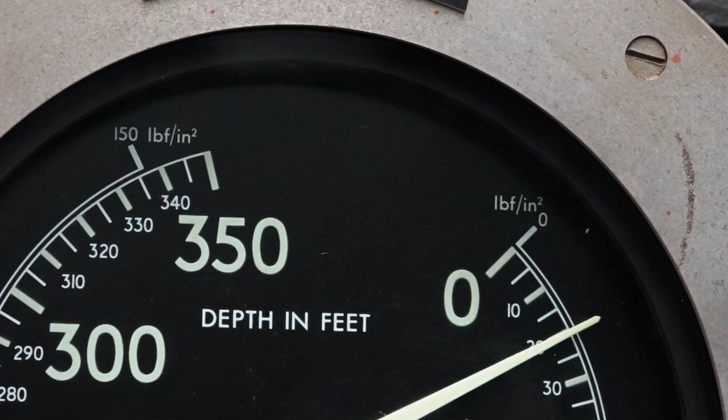April 10th, 1963. The most advanced submarine in human history dives off the coast of Cape Cod for a routine certification test. She never comes back up. More than 60 years later, the Navy will not tell you the full story of what killed her. Not really. No, it was not a Soviet torpedo. No, she did not dive past her crush depth. The USS Thresher died from 3 engineering decisions that were built into her on purpose.

129 men went down with her, 16 officers, 96 enlisted, and 17 civilian shipyard workers who came along to watch her pass her final test. Every American submarine that has ever sailed since exists in her shadow. Every welding standard, every inspection rule, every safety protocol in the fleet was written in her crew's blood.

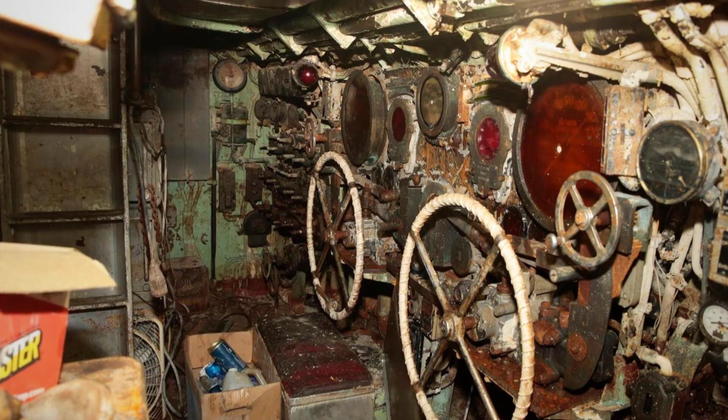And the worst part is not the flooding that started it. It is not the reactor shutdown that made it fatal. It is what happened to the one system that was supposed to save them. But first, you need to understand how she started dying.

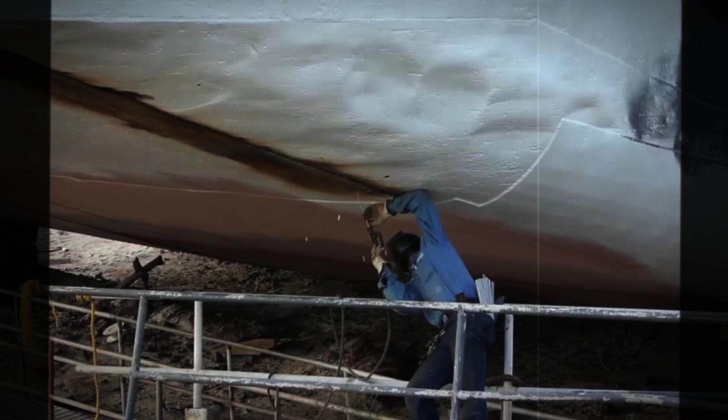For decades, the United States Navy joined seawater piping the hard way. You welded it. A welded joint is slow, expensive, and brutal on the welder, but when it is done right, it is stronger than the pipe it connects. You can X-ray it, you can inspect it, you can trust it at depth.

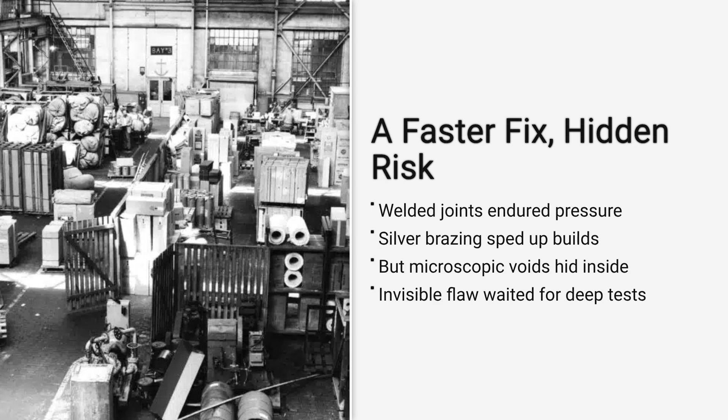But in the late 1950s, Portsmouth Naval Shipyard switched gears. They standardized silver brazing on thousands of joints throughout the Thresher-class seawater systems. It was faster, it was cheaper, it was rated for the pressure. And that last part turned out to be a lie. Silver brazing has a fatal flaw.

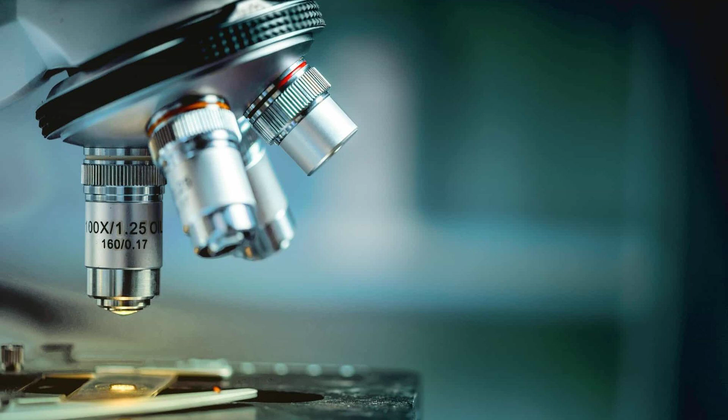A brazed joint can look perfect from the outside, shiny, smooth, correctly shaped, while being hollow, voided, or cold on the inside. You cannot see it. In a swimming pool, it does not matter. At test depth, every square inch of that pipe is carrying more than 600 pounds of pressure. A bad joint does not leak. It detonates.

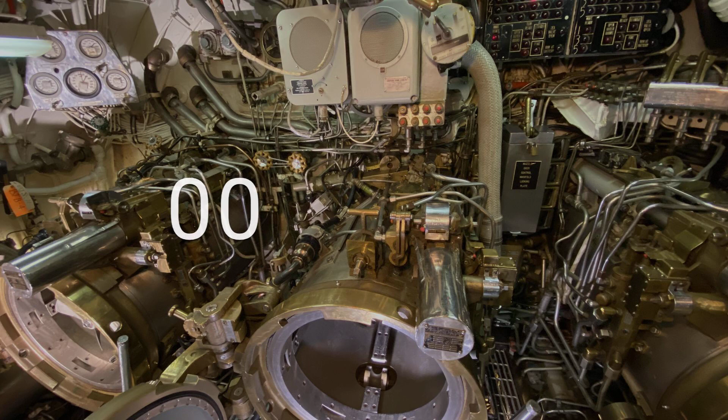After Thresher went down, the Navy did something quiet. They pulled her sister submarine, USS Tinosa, out of the water and ultrasonically tested the silver brazed joints nobody had bothered to reinspect. The results were bad enough that the Court of Inquiry refused to print the exact percentages for years. Roughly 14% of tested joints failed Navy quality standards. 14%. On a submarine already commissioned, already crewed, already at sea.

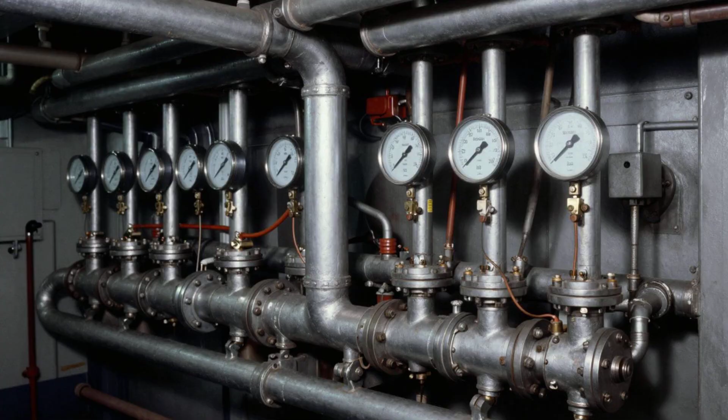When one of those joints let go in Thresher's engine room that morning, a submarine became a high-pressure fire hose aimed at the electrical panels. Water did not flood in. It atomized. And that alone would not have killed her. Thresher was built to survive a flooded engine room. She had propulsion, she had ballast, she had reserve power. She should have driven straight to the surface. Except the moment that joint failed, a second engineering decision kicked in and made absolutely sure she could not.

Earlier, American submarines could take a hit and keep their reactor alive, flood a panel, isolate it, keep power on the screws, and get home. But by the time Thresher sailed, naval reactors had rewritten the rules. Admiral Rickover's engineers standardized automatic reactor scram, an emergency shutdown, for a specific set of electrical anomalies.

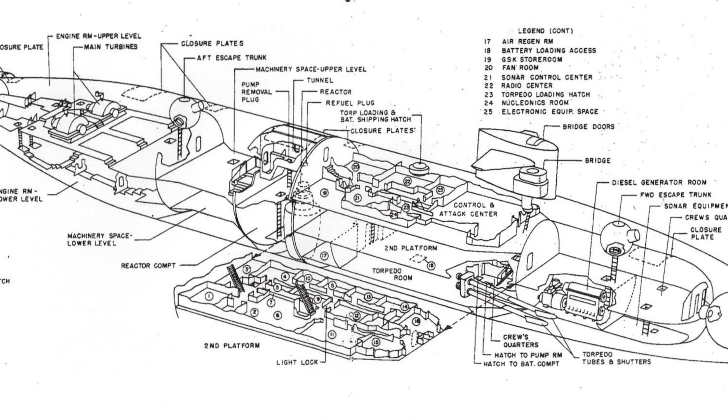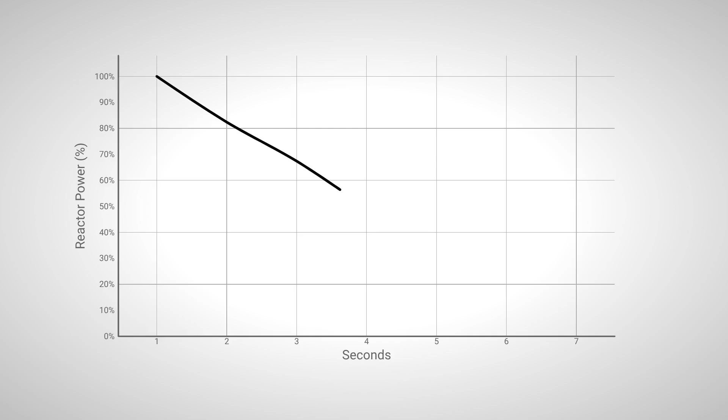The logic was sound on paper. Protect the reactor core from damage. The crown jewel of the fleet must never, ever be compromised. So at the first whiff of electrical trouble, the reactor shuts itself down. Hard. Immediately. Here's what that meant at 1,300 feet.

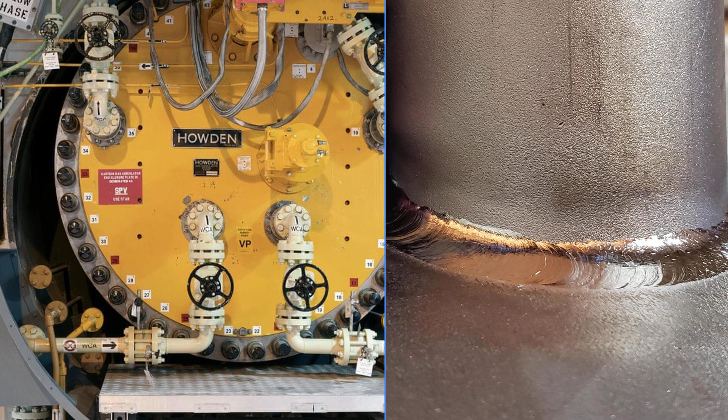A scrammed reactor cannot be restarted in 60 seconds. The restart procedure at the time took minutes. Minutes the Thresher did not have. A Thresher-class submarine without reactor power has 2 options. She can run on steam reserves, which bleed out in moments. She can run on batteries, which cannot push 3,700 tons of flooded steel upward through a quarter-mile of ocean.

Neither option buys her a surface. The reactor almost certainly scrammed within seconds of seawater reaching the electrical panels. It did exactly what Rickover's rules told it to do. It saved the core. It doomed the crew.

And the quiet admission came years later, buried in a naval reactor's procedural revision. The scram restart protocol was modified after Thresher, specifically for at-depth emergencies. That change is an obituary written in engineering manual form.

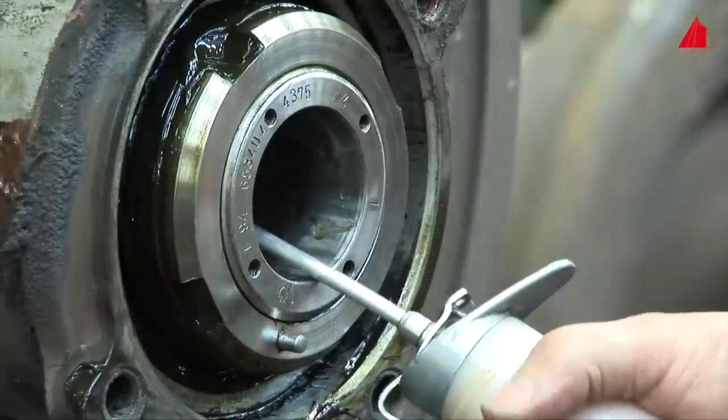Once the reactor dropped, the crew had one card left on the table, one final system. Punch the high-pressure air into the main ballast tanks, blast the water out, ride the buoyancy up. It had saved submariners since the Great War. It was going to save them. And it is the system the Navy built to fail.

Every submarine carries thousands of pounds of stored high-pressure air for one reason. You punch a valve, the air screams into the ballast tanks, the water gets shoved out, and the boat rockets toward the sky. Simple, physical, reliable. Submariners have bet their lives on it for 100 years.

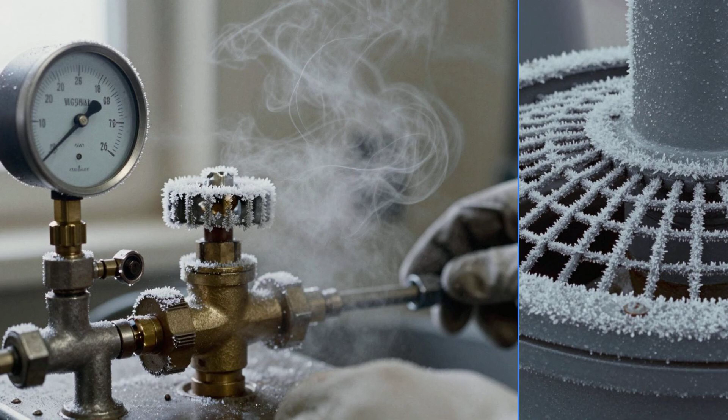On Thresher, the air was stored at around 4,500 pounds per square inch and piped through fine mesh strainers to keep particulates out of the critical valves downstream. Standard design, industry standard. Here is what nobody in that design meeting apparently remembered from high school physics. When compressed air expands through a small orifice, it cools violently. Adiabatic expansion. The faster the air moves, the colder it gets.

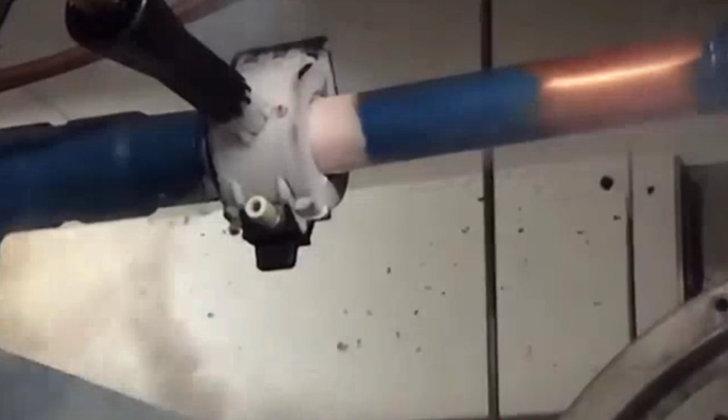On Thresher's air system, the temperature at the strainers during a full emergency blow dropped low enough to freeze any trace moisture in the lines. And there was moisture in the lines. There is always moisture in the lines. The strainers iced over. The air throttled itself. The emergency blow built its own wall against itself.

This is the part that makes your hands cold. The harder the crew tried to save themselves, the more ice they formed. Every second of blow built more blockage. The Thresher's own survival system fought her crew to a standstill.

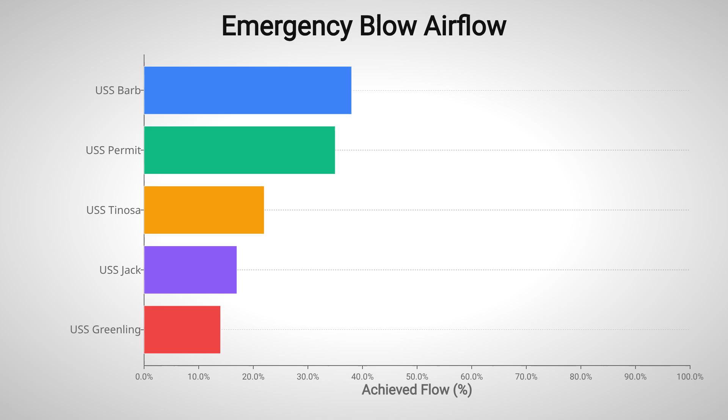After the loss, the Navy quietly ran emergency blow tests at depth on her sister submarines. The ice formed exactly as suspected. Some boats reached only a fraction of the expected airflow before total blockage. Every SubSafe redesign since has required dehumidified air and re-engineered strainers. The only reason every American submariner alive today is alive.

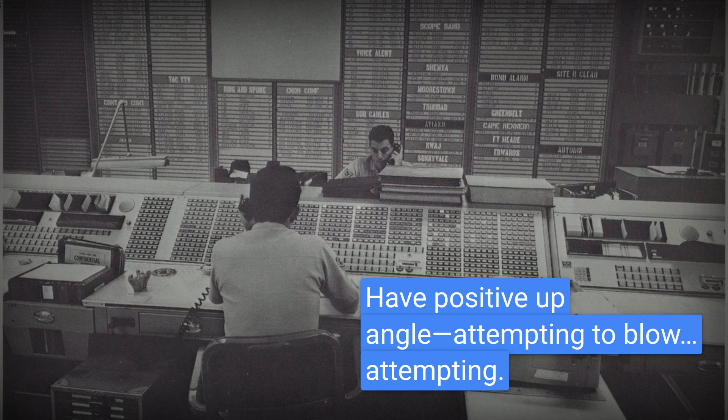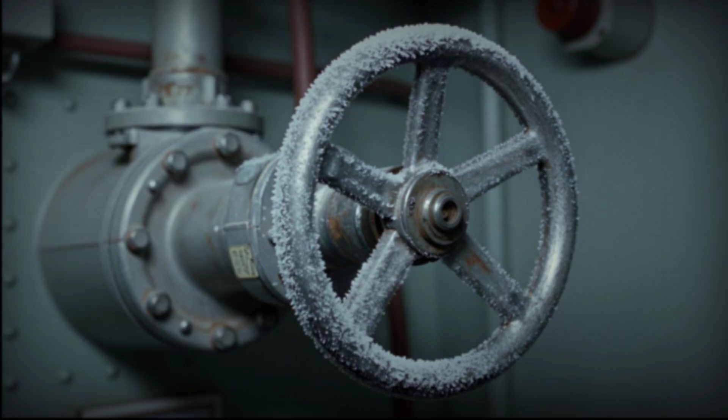The last coherent message from the Thresher was 11 words. Experiencing minor difficulty. Have positive up angle. Attempting to blow. Will keep you informed. Attempting. The word they chose on the radio in their last conscious seconds was attempting, because the air wasn't making it. The blow that was supposed to save them had already frozen shut. 129 men died listening to the sound of ice choking their own rescue.

And that is what the Navy spent the next 6 decades covering up with a program called SubSafe. So what was the fix? A program. SubSafe, born in December 1963, 8 months after Thresher went down. Since the day SubSafe went into effect, not one certified American submarine has been lost at sea. Not one.

Every weld is documented. Every joint is traceable. Every piece of air piping is dehumidified and engineered to survive its own use. It works. It has always worked. It took 129 dead men to write it.

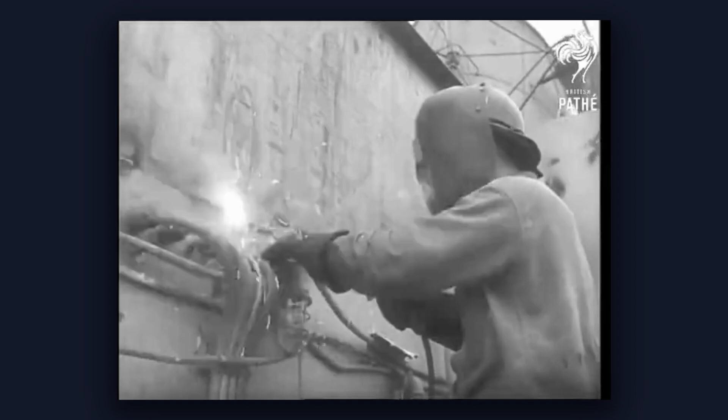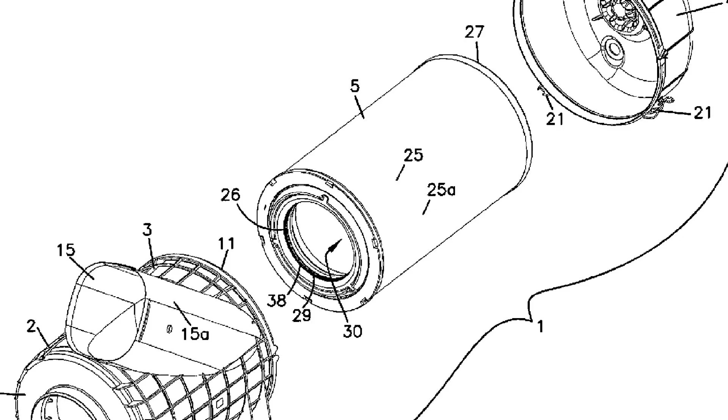Every time a corporation, a shipyard, or a manufacturer tells you that a new method is faster, cheaper, and just as safe, remember the Thresher. Silver brazing was faster, cheaper, and considered safe. It killed her. Automatic reactor scram was safer for the core. It killed her crew. Standard strainers on high-pressure air were industry standard. They froze shut while her captain was still talking.

The Navy still does not say the word ice in its official summary of April 10th, 1963. Now you know why. They named a submarine after her. They should have named a warning after her.